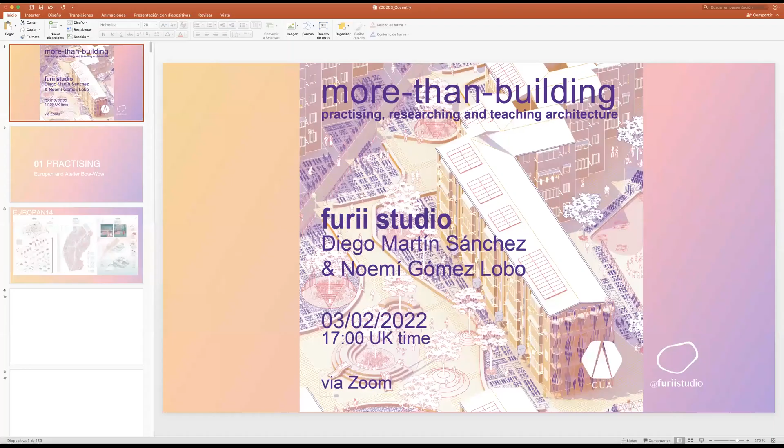Yeah, I think we can start. Let's start sharing the presentation and talking with drawings. Okay. Can you see our screen? Yes, we can. Okay, perfect.

The title of the lecture is More Than Building, and our intention is to show our personal approach to architecture, and how this belongs to a bigger context. In school, most of you are very much focused on building, but through our years in school and after, we diversified our interests and got more interested in other things, and also in the network of practice and of building.

So maybe we can start with the structure of the lecture. We will begin by showing some designs of ours in competitions and art biennials, then briefly touch on our research interests, and finally some examples of our classes at university. Then you will see how everything is related.

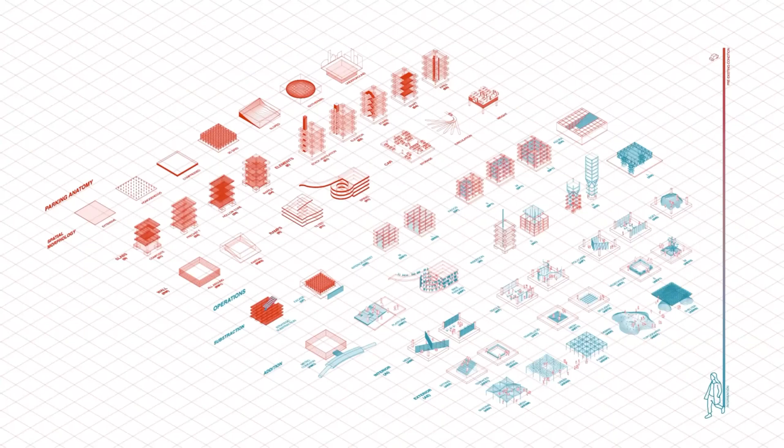This was the premise, and part of the project was to go through this research of really dissecting the typology. This is a very special competition that has been going on for 30 years, in which you can really apply research into the final project, and it's also an open-ended competition.

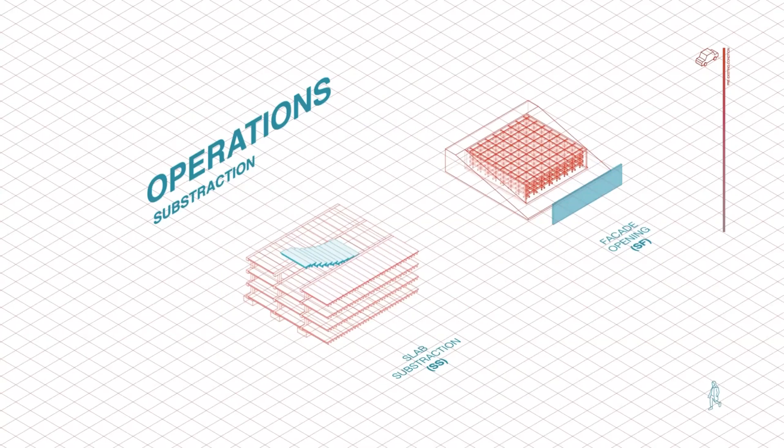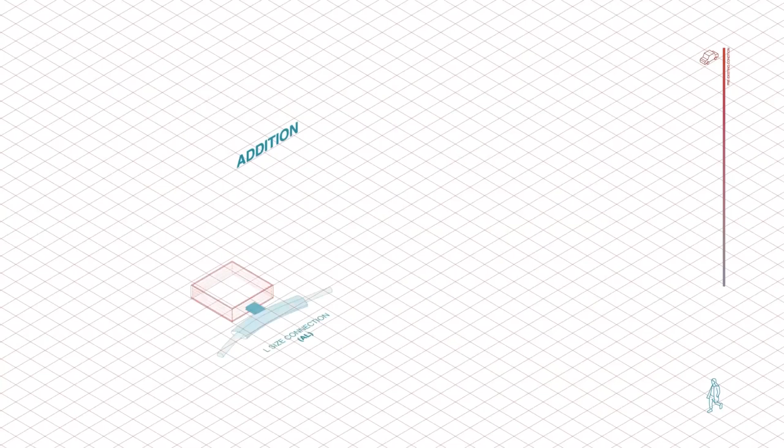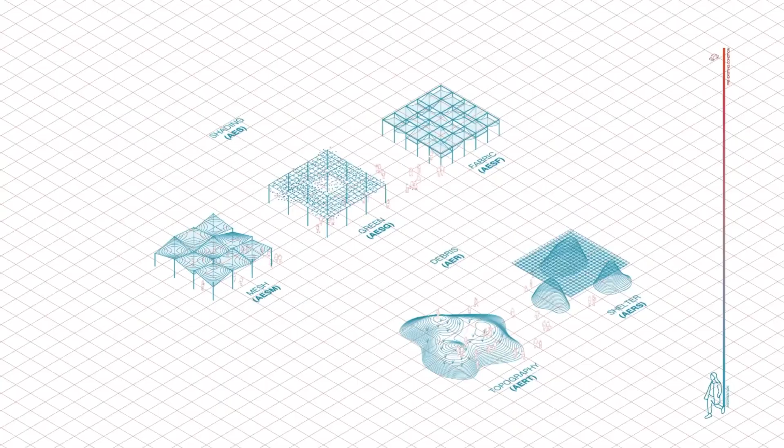In this case, we examined the parking's anatomy and proposed operations of subtraction, since we were operating with the underground. Our aim was to see this as a tool for negotiation, because we knew that even if we won the competition, we would need to discuss with many people how to approach this somehow radical approach to architecture, which involved stripping these parkings.

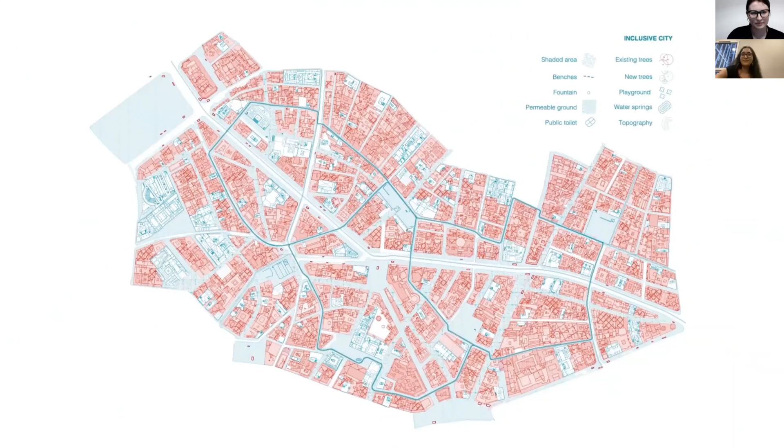All of these are operations of mobility and understanding the inclusive fabric of the city, and how to renaturalize a city center that was much thought for cars or for tourism and not so much for the neighbors or the daily life in Madrid. So how can we reverse this and use these squares as catalyzers of common living?

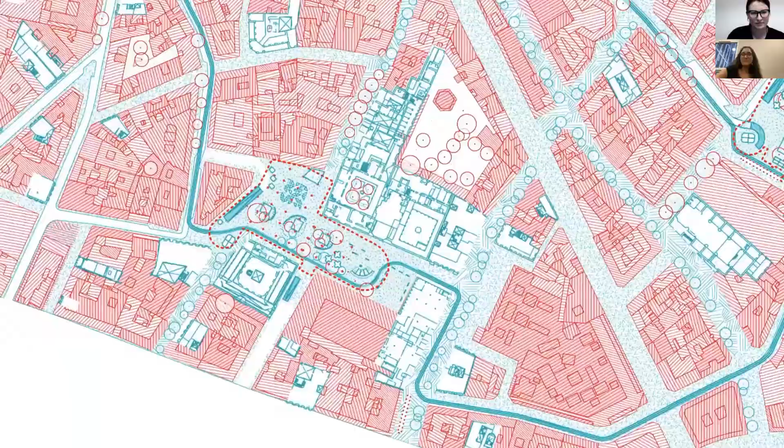Then we went to each of the squares specifically as case studies. We won't get into each of them particularly, but it was important that at this moment Noemí was starting her PhD thesis. We were in Tokyo at this moment, studied in Madrid but were in Tokyo, and somehow we were applying research on gender studies in urbanism into a competition.

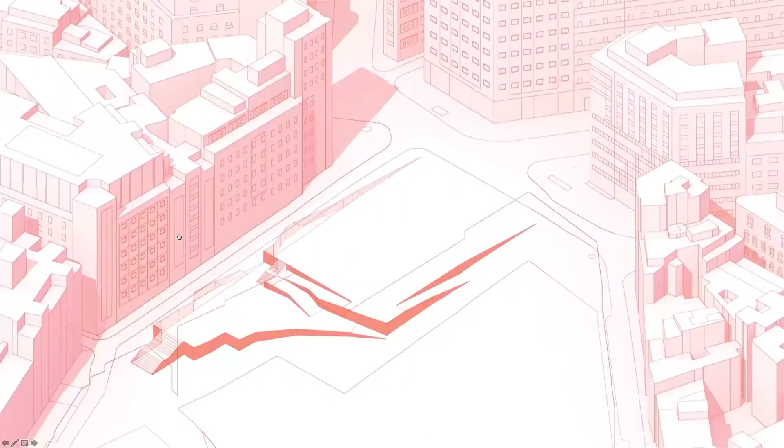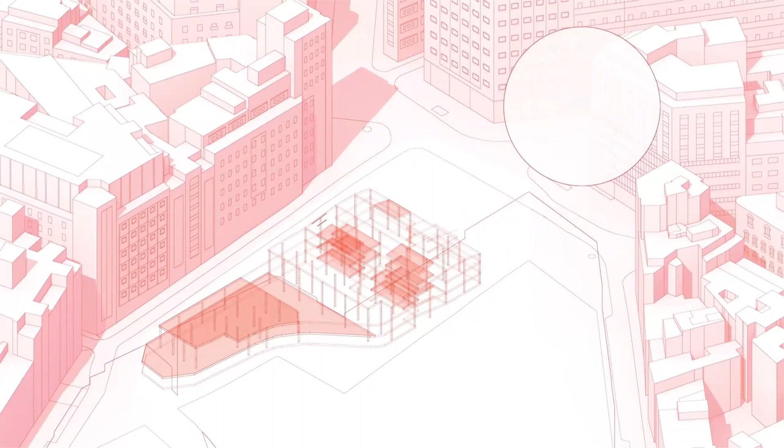Even though the actual project was to create these public infrastructures in the city center, in this kind of parkings that we are going to see. The type of operations that we did: we identified what was underground, and then we started to apply this kind of unbuilding, subtracting facades and concrete walls and concrete slabs, in order to make this car building into a citizen building.

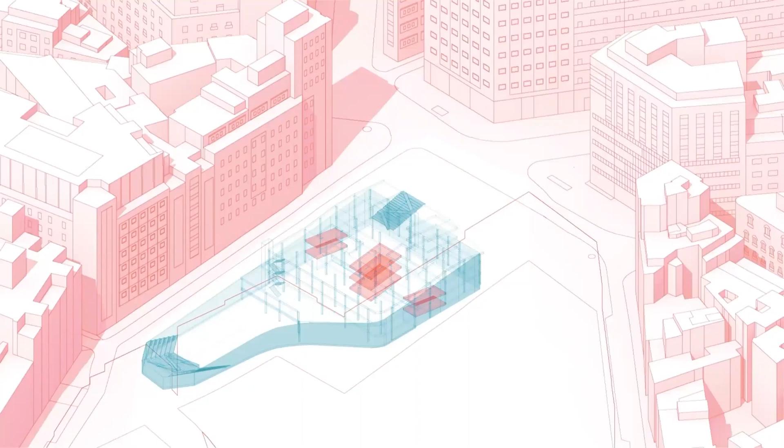But somehow all these scales, from the real detail of how to intervene in these structures, to the urban fabric, to more theoretical ideas of what we were researching at the moment, started to collide, and we started to mix them in this competition.

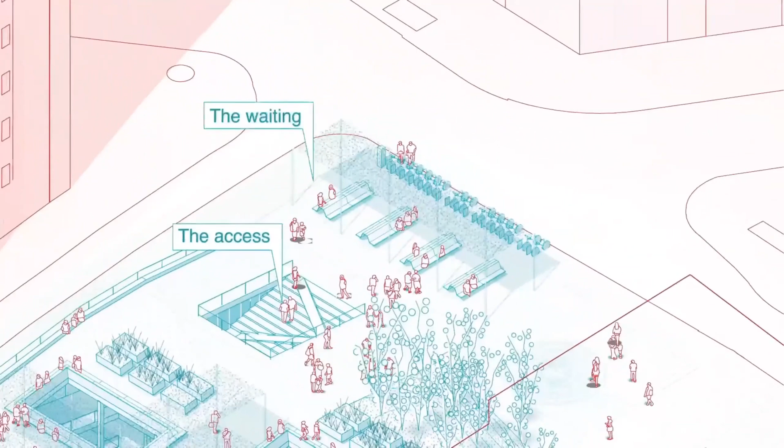Here we were talking about thermodynamics, how this can be sustainable, but we were more interested, apart from energetic or environmental sustainability, in social sustainability as well.

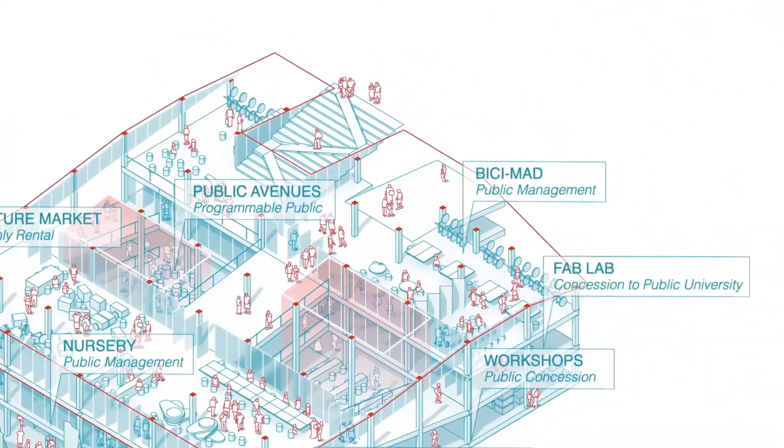Because in these squares, despite being in the city center, they were almost empty during the day, and 50 meters away they were extremely lively public spaces. So we thought about the network of actors that could somehow inhabit a building—which institutional actors, which parts could be rented or could be metabolizing inside this structure—and then there was the next layer of thinking beyond just architecture as we learned in school, but also how this space could be managed.

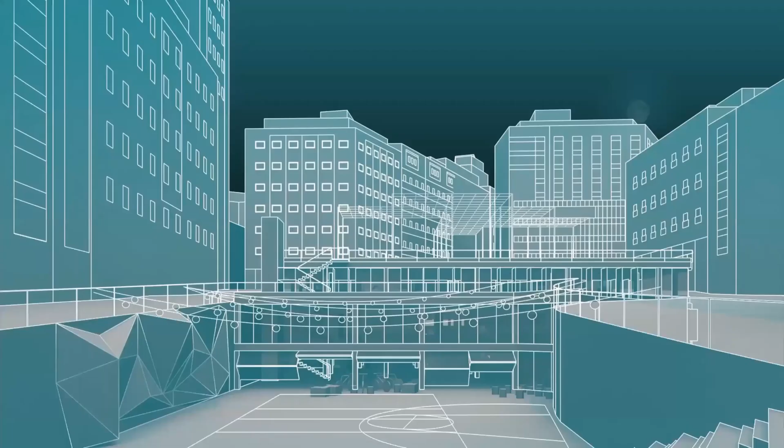As a commons. And of course it's very much inspired by Lacaton and Vassal's way of thinking, of really reusing what is already there.

In this case, we were really understanding the underground parking space as a spatial resource for the city, and by changing the paradigm of mobility and shifting perspective, we could recover or reuse instead of building everything new. There are already many things in the city—we don't have to start from zero, just put another perspective on it and give new light in order to propose new spaces.

This comes back to the idea of open-endedness. It was not a common competition where you just design a library and if you win, it stays like that. We knew that in this competition we would have to engage in a process of negotiation.

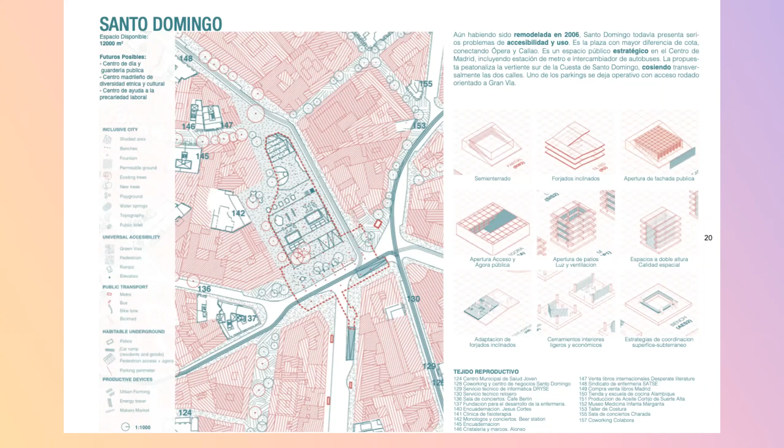So even though the project we just saw was centered on one of the squares more deeply, in the end we ended up discussing with the town hall and the actors involved, and focused on another of the squares, but always keeping the strategies we developed at the beginning.

It's like a very lively space, but also it has been neglected for many years. With all the ghosts and the wanting to speculate and really gentrify this area, we could feel that on purpose this space was not taken care of at all, even though it was actually one of the most lively spaces inside the building itself.

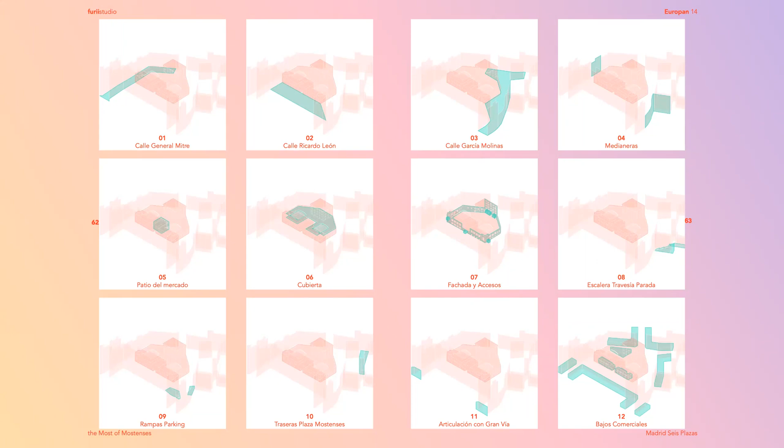So here, for example, you see another analysis, more urban, in relation with the building, of what are the potentialities or the latencies that this urban fabric holds and how we can improve them.

So the next step, as we proposed in the Europan competition, was to really negotiate and discuss and establish a dialogue with the people that actually use this space, the merchants that are working there every day and know very much about this area.

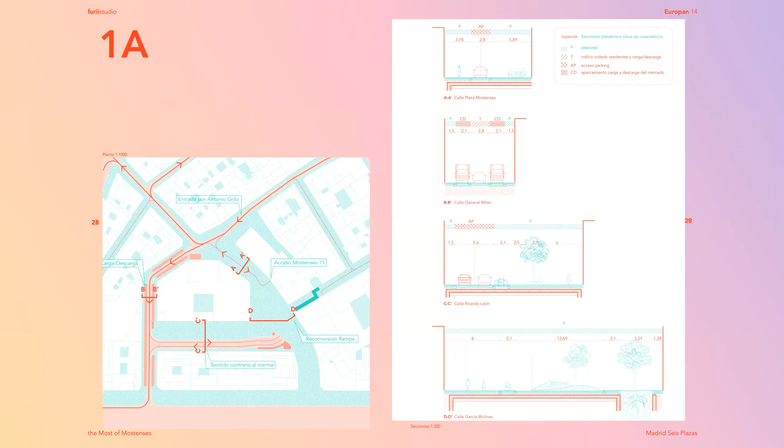And then with them also talking about things that, when you realize, from the competition to the actual implementation, there are all the complexities, like how to discuss logistics. Logistics was very important for this project, because how to load and unload all the food, all the things they need in the market to function, really conditioned what kind of public plaza we could release or afford in this urban setting.

So we proposed many options, also with our expertise, to dialogue together with them and negotiate what was best for the city and for the users.

I think at this point it was very important, this kind of participation of other actors, which was not something that was asked of us or whatever. So we kind of jumped outside of what we were supposed to do, and we also jumped in time.

Because the problem for us is that we wanted also to intervene in the underground parking, which is a public infrastructure, but somehow is rented to a private company that is exploiting the building these days. So we could not access it, we could not change it, but we somehow proposed a plan for the future. We don't know if it will get made, but by attacking this not-so-long future, we all the time go beyond what is supposed to be our task.

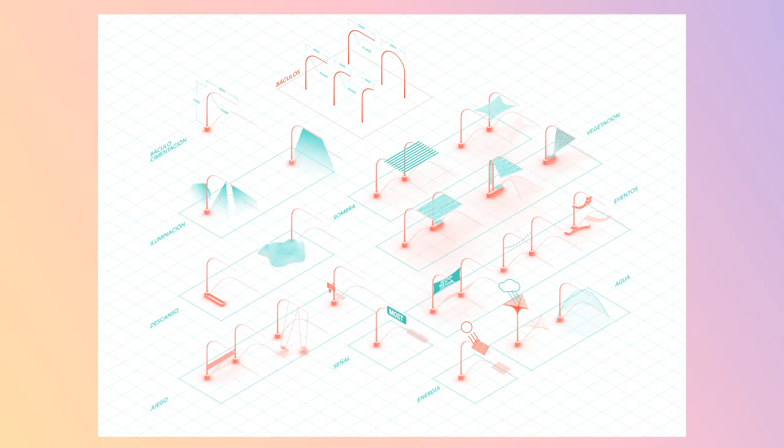In this case, we were trying to reduce traffic lights and somehow recycle all the urban furniture that populates the cities, but that is directed to cars and not to people, and integrate them into our design.

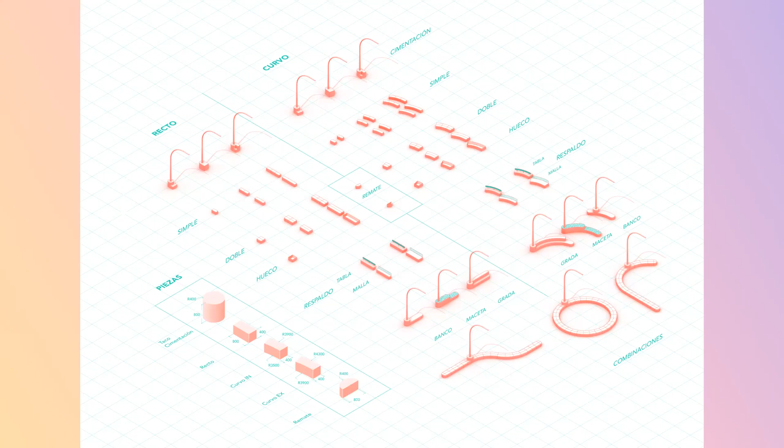But this kind of catalog and open-endedness of things, more than one solution, also helped us to discuss, and not to get rejected or fall too much into 'this is my design and it's supposed to be like this.' Because in the end we are dealing with many actors.

And this drawing was important for us because our project is actually only the public space, let's say street level. But here we started to intervene also in the market itself, in its rooftop as well.

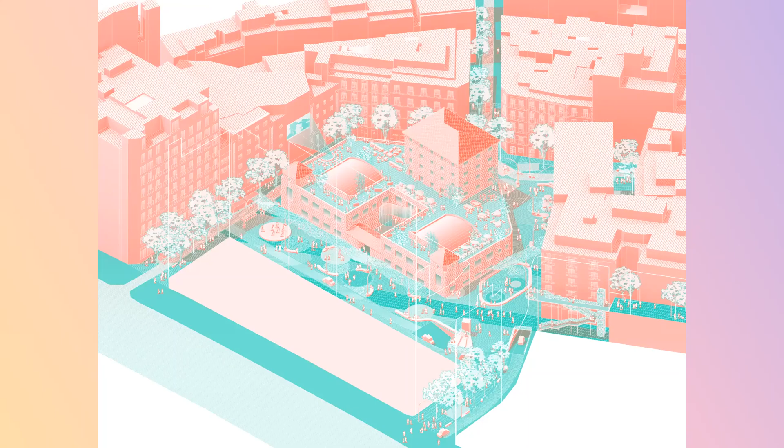We imagined there were some projections towards the neighboring buildings, which are cinemas, and it's like neighbors. We were also occupying some other parts of the street, and by doing this and showing, on the left how we were changing the public space, and on the right how we also imagined the rooftop would be activated, these are other activities, but also the imagination.

Like this stair, for example, that we changed for accessibility reasons. Somehow we created this view from the top of this building, which is public infrastructure but also very much abandoned. And by this, the merchants in the market got very interested and excited, and made it their own. Maybe we can continue.

This is the next edition of the Europan. It happens every two years, and in this case we were applying in another part of Madrid—we always apply in Madrid, in this case it's an obsession. It's a similar process, and in this case we didn't win, we came second, the special mention. But it was the same idea of what we were pursuing at that moment, which was my doctoral thesis about urban forestry, and we were applying and seeing how we could implement these ideas into, in this case, the opposite of the other project.

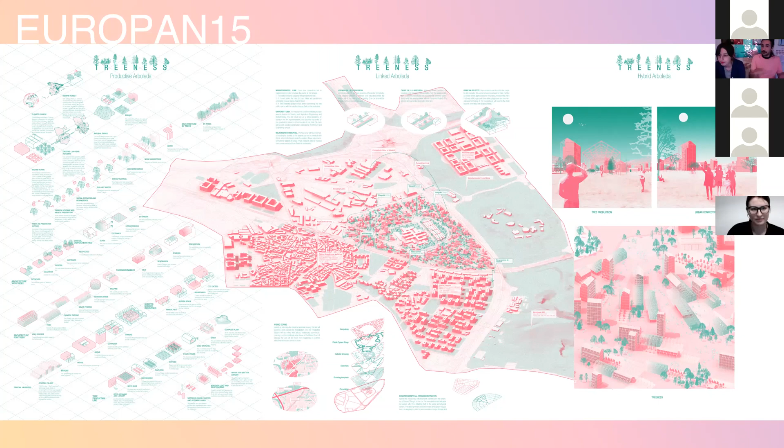Which was like a plot given in the total outskirts of the city, where they built a hospital surrounded by only highways and crazy things. But in this case, we also started to think about how we could think about the production of trees as an industry, investigating the typologies of greenhouses.

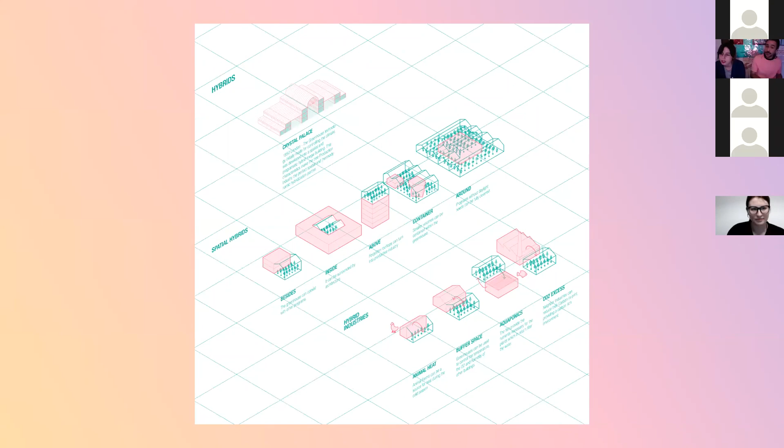These greenhouses have energetic conditions that could be hybridized with other uses, for example housing. Then we started to learn also from the fabric that was around, and in the end, created this kind of hybrid.

In any case, this goes totally against what probably will get built, and what has been built in Spain for 20 years. Now we have many places similar to this one, which is just huge avenues and roundabouts, but nothing. It's urbanized but without people, because of the speculation process that burst around 2010. So somehow it was this level of merging these things. This is the next Europan.

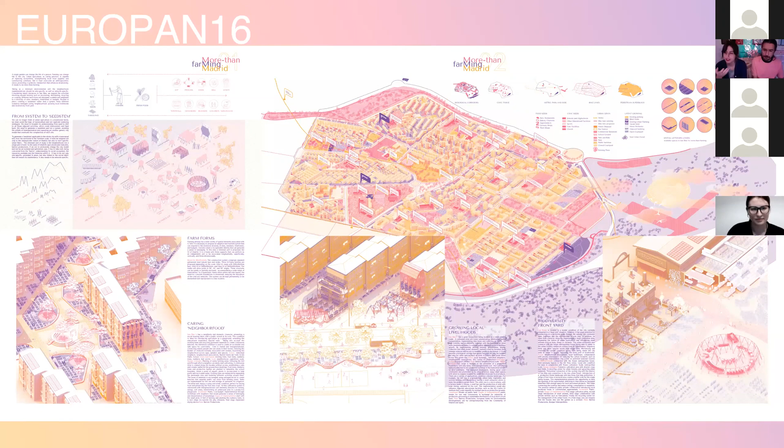You can see a continuation in time, that the topics of recycling, reusing, or understanding with a new vision what is already there, to really enhance certain capacities of the city, is the common thread of all of these projects, and of course also Madrid.

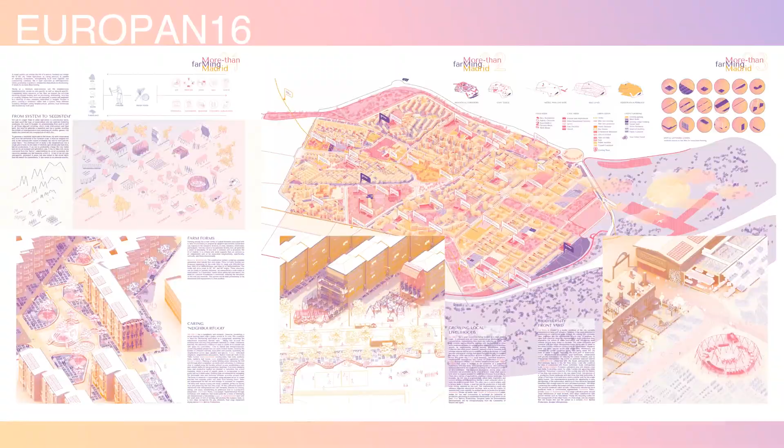In this last Europan competition, again, this competition always raises very interesting questions, and this time it was how to think about urban farming in Madrid, in the city. So first of all, we started thinking about what urban farming means and how it can be more than farming.

With this I mean that, of course, we all know the globalized system that we have, and what kind of environmental problems this can entail, and also how these urban farming practices can arise as alternative practices to really grow local food, and also engage with other agents in the city, not only human but also non-human.

And also to go beyond that of growing itself, to imply more than farming in terms of eating, processing, cooking, and also metabolizing things. So we wanted to expand a little bit the notion of farming, because we thought it has more possibilities for the city, and also for the proposal that we could do.

So in this case, Europan was also proposing some plots. They already have a plan called productive neighborhoods, 'Barrios productores,' identifying some empty plots in the city that are potentially transformable into urban farming plots.

And they were proposing to the competition 5 very different plots, asking us to select one or several and give a solution for urban farming. So in this case, we selected 3 of them that were very close together at the neighborhood scale, because we understood that the environmental unit should be the neighborhood, not a single plot.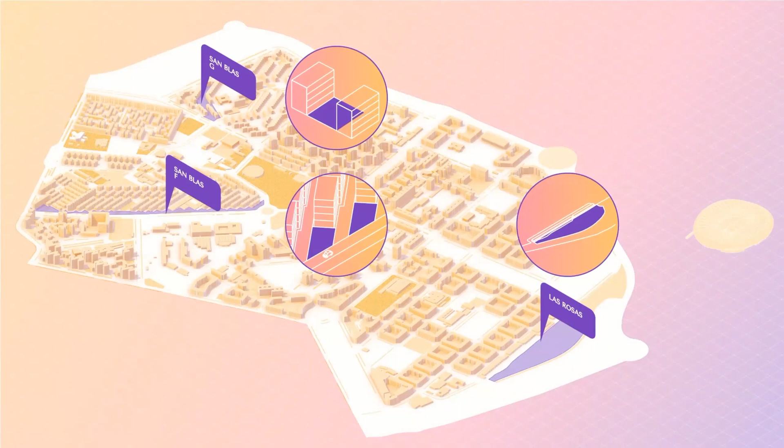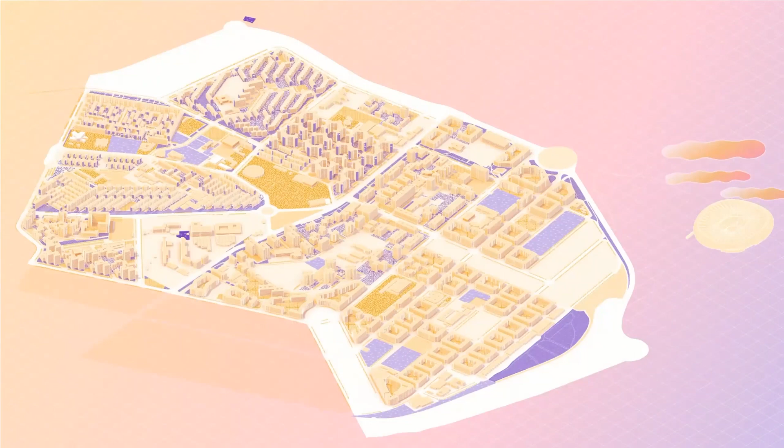So again, very different plots. But again, looking at the neighborhood, we could expand more typologies that could potentially be transformed into more than farming. We were trying to awaken this imagination in the city and really change the paradigm of the typical suburban town that depends on the center for absolutely everything.

So in this next phase of the urban system, we were linking with green areas already and the metropolitan forest, which as you can see is very related to the previous project, also understanding all the fabric related to food and to care, in order to introduce it together with the urban farming system.

I don't know if I'm forgetting something. No, I think you're doing great.

I think what is important here is that they asked us, in reality, about very specific plots, and how to solve things like if the corner got sun, or how we were going to build a greenhouse or something like that.

In the end, we went back and showed this scale, which we thought was important to show that each of these projects belongs to a bigger network of things. If we put the glasses of this urban-more-than-farming approach, then we can see that every bar, every bakery, everything that's already there could belong to this. There's a lot of urban farming that we were not seeing.

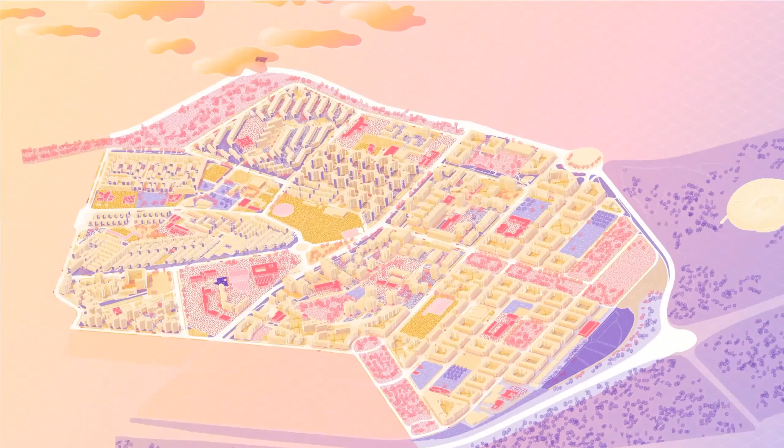We also thought about urban strategies for mobility, for public infrastructures and public spaces, in order to make this also safe, somehow super blocks that will activate this degraded area of the periphery of Madrid.

Following this, similar to what we had seen, we proposed this frame which we call the M of Madrid, one of these strategies in order to occupy the plots that they gave us. It was modular, and we could adapt to many scales: mini, midi, maxi. We made this kind of word play.

For us it was important as an imaginary, to show this imaginary of what we were supposed to do, dealing with this kind of growth in terms of different scales, with fences where things could be separated, places for storing. But then we were expanding, saying we need to think more beyond that.

We need to think of a structure for distributing, a structure for storing, a structure for cooking and celebrating the food, and this very collective meaning of eating that was missing in this area, and also in the concept of urban farming.

Going a little bit beyond what is productive, also thinking what is reproductive, how we can think in cycles more like that, just creating surplus.

These are some of the elements that, as you can see, we thought of, similar to the process in other Europan competitions, also thinking of how to even compost these things, how to deal with the residue of the city.

These are three scenarios of three of the places that they gave us, in which we were slowly doing different operations that went beyond just cultivating areas.

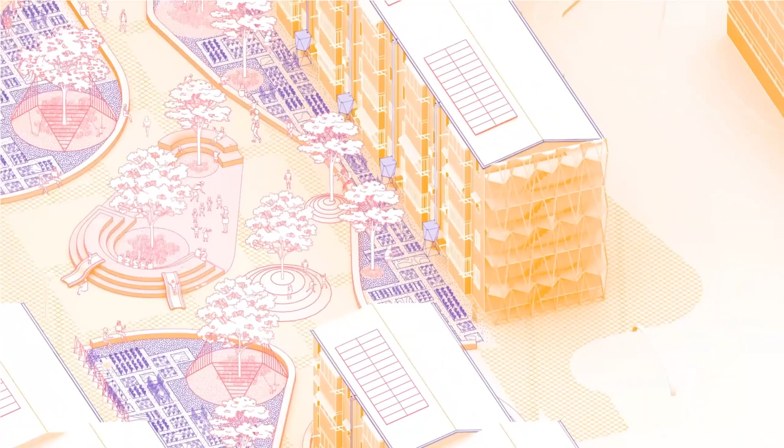We started to think which are the actors that were surrounding. We had, for example, some empty and very well-orientated place with sunlight and wind where we could dry food.

We could create some playgrounds for this space in between buildings, which is free of cars and very much safe, incorporating the elementary school that is next to it.

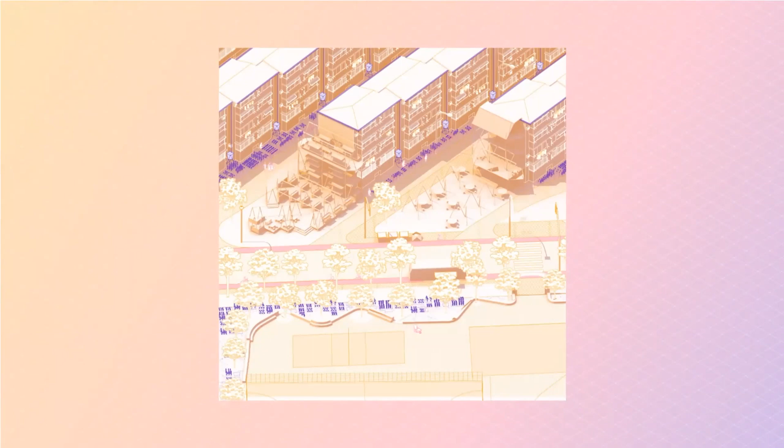Here was the other scenario, next to the street, and in this case we were proposing how to make businesses, taking advantage of this situation of visibility. There could be some greenhouses, some bars, but in any case we were using all these strategies that we showed in the beginning.

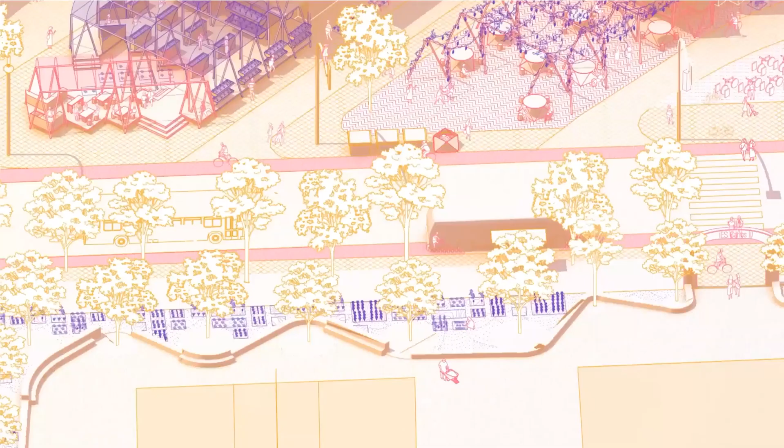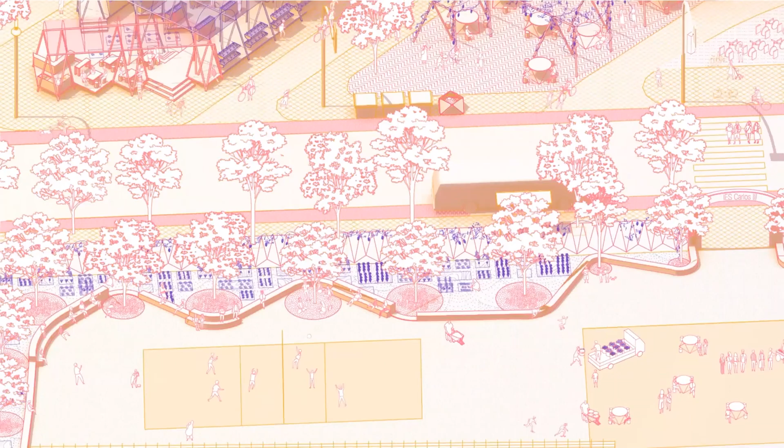When we arrived at these solutions that are completely open-ended, an open discussion we are having these days with the town hall, it made sense. It was not something that just came from above, but something that was slowly cooking until we arrived here.

This is just the last one that we have, which was this open area next to another highway, another kind of residue of the urbanization of the periphery of Madrid.

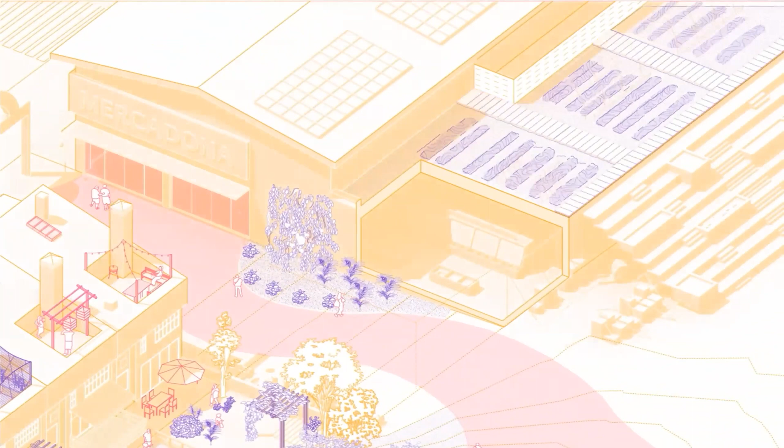We were imagining how the neighbors were starting to also get into this farming, collaborating with the local chain of supermarkets, like Mercadona, which is something very unimaginable, and selling these things inside.

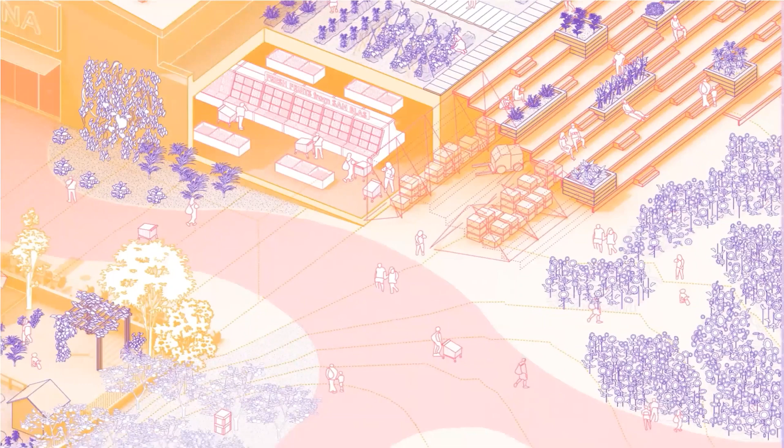We know that maybe these scenarios are not fully possible. This is our ideal future, but somehow we could see that even if we jump one or two steps or elements, we could still make this urban farming or modern farming possible.

Maybe next, very briefly, the next step of our practice, which is of course very related to our research, because we were in Tokyo researching in the laboratory of Yoshiharu Tsukamoto, one of the members of Atelier Bow-Wow, together with Momoyo Kajima. This allows us to practice from the lab in another way, and also as a studio.

So this hybrid format was very useful for us as young architects.

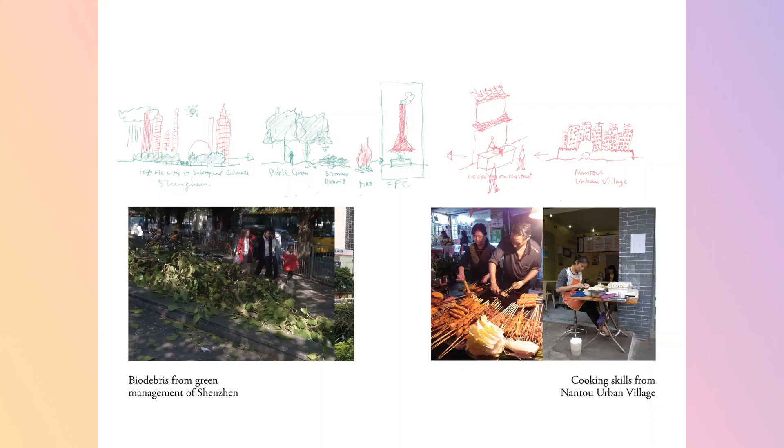One of the first projects we did together with Tsukamoto was this Fire Foodies Club, which relates to the previous project. It combined recycling the biomass, the debris in the city from the maintenance of city trees, together with cooking activities already happening in Shenzhen, China, where the biennial was happening, this was 2017-18. We proposed this pavilion that could catalyze all these activities, the cooking together, reusing this biomass.

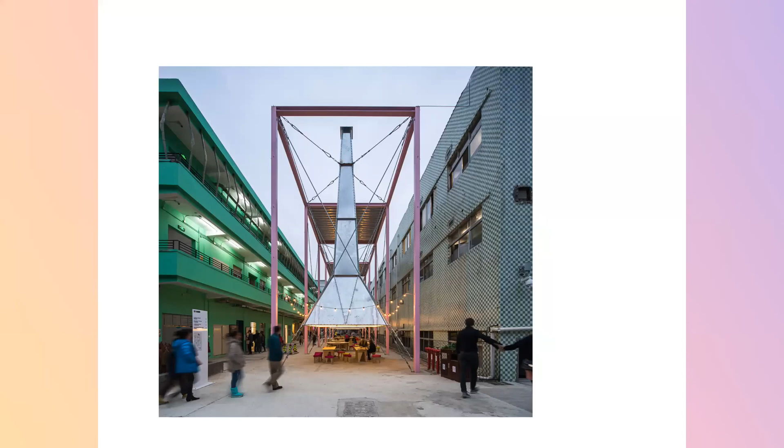But very ironically, just some weeks before the Biennale opened, they announced we were not able to do barbecue. So these big chimneys, the purpose was to do an open fire, an open barbecue, but they said the city was so polluted it could not even burn a single branch of a tree anymore. So this pavilion became like a monument to the contradictions of the city itself, where sometimes you cannot even do a barbecue in public space, but you are surrounded by highways and a very contaminated mobility system.

Fortunately the pavilion was very successful, because as it was a very open structure, it allowed for sheltering unexpected behaviors also. It had water, it had seating, it had shade, and it was a perfect place for performance. All of these activities happened during the days of the biennial, and it is still there.

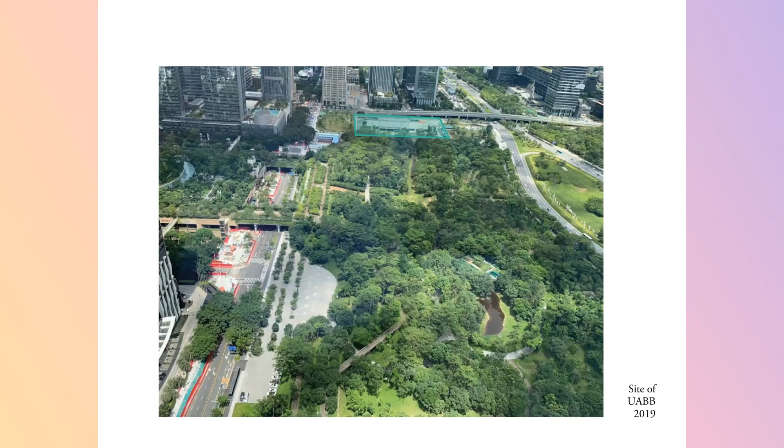The next pavilion is also very related to the previous projects, as you can see. It was 2 years later, but the place had changed. This time it was in the city center, somehow a financial district, in this very beautiful subtropical park which was totally disconnected from the city. The biennial was happening in a train station, but our project was inside this park.

We started to think beyond this, together with the urban forestry, identifying it as an interesting practice happening in the city, going beyond this burning behavior, which somehow stopped us because of the bigger network of global climate change.

Together with the workers, we made this building, which was kind of a diagrammatic building, where all the resources from the forest came and transformed slowly - from the big trees that come with typhoons into logs, into processes of cutting, making timber, making a workshop of furniture with the timber, also chopping and making barbecue again, transforming the waste into compost, and producing small trees again in a sort of greenhouse in this project.

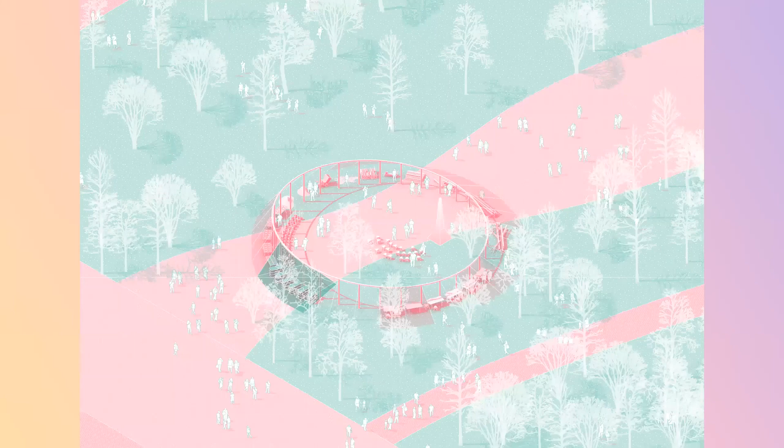But in this case, this project was not built, because it was also the moment when China and Hong Kong were having political issues. So the government canceled half of the interventions that were going to happen in the city.

So it stayed like this. This was somehow together, like Europan here, having two separate pavilions two years apart - we could start to see and learn from one project to the next. In the first one, we really thought we were trying to create this human commons, but we created a linear narrative that, the moment it was cut because of a bigger network, lost its meaning. In this one, we tried to create something more circular, incorporating different resources and processes, and it became stronger, also not just thinking about humans but incorporating the forest as an active agent.

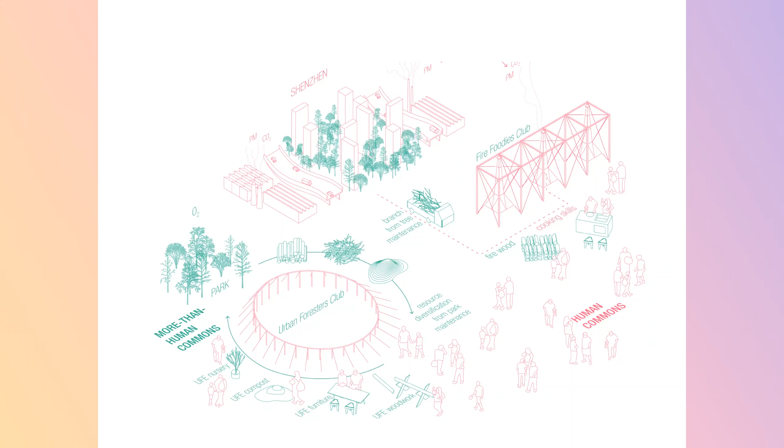This is the final project we did together, this past year. It was reflecting on uselessness and the production of things that come with, in this case, us experimenting with COVID - all these kinds of new plastics that surround us, new kinds of designs appearing, and how these moments of change eventually disappear, and with them a lot of waste, but some things remain. We were interested in rethinking how to eat together in a COVID situation, so we also studied historically how this changed, from eating together around a fire.

I think we will go through research and teaching with some key examples, so you can see the link between what you just saw and what we were researching in our thesis, and how we try to apply what we research academically or theoretically into applied projects. So first, in the section of environment, Diego will explain how it's very obvious with the previous pavilions.

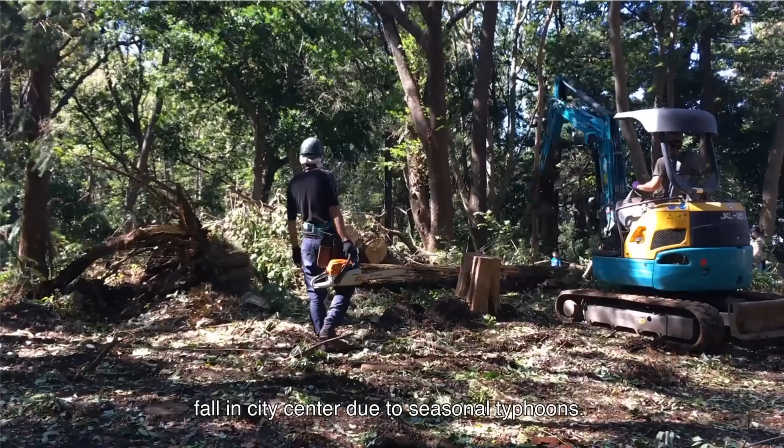This is a situation that happens in Tokyo every year with typhoons, and that was very shocking for us coming from Madrid, where of course we have trees, but this kind of landscape of real forestry, dealing with huge trees falling because of this very strong phenomenon, was very important for us.

We started to dig into these practices happening in this crazy city - when you think of Tokyo, maybe you don't think of this. We got interested in what this practice is, which kind of practices around the world deal with this urban forestry, in the sense of dealing with the resources that come out of it, and also with the actors that can be together with it.

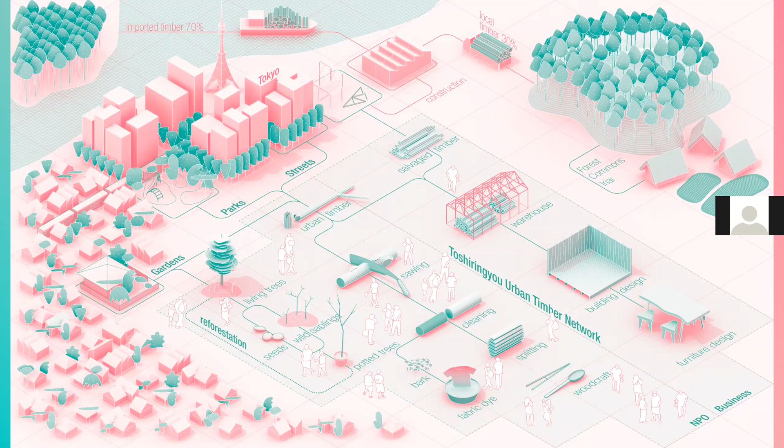For example, here we were mapping and diagramming a network of an architect who is also an urban forester in Tokyo, who every time a tree falls gathers a community and makes a workshop, and everybody takes care of that tree and turns it into furniture and so on. It somehow has a business side, but also an NPO side, which was very interesting for us.

Also thinking about how in the urban environment, in the built environment, we have made these empty spaces for trees and for the forest in the city, and somehow they're only accessible by workers - we are in a very passive manner. But by researching Tokyo's parks, doing a lot of field work, we could start to see some repeated elements that allow for interaction between humans, non-humans, and resources.

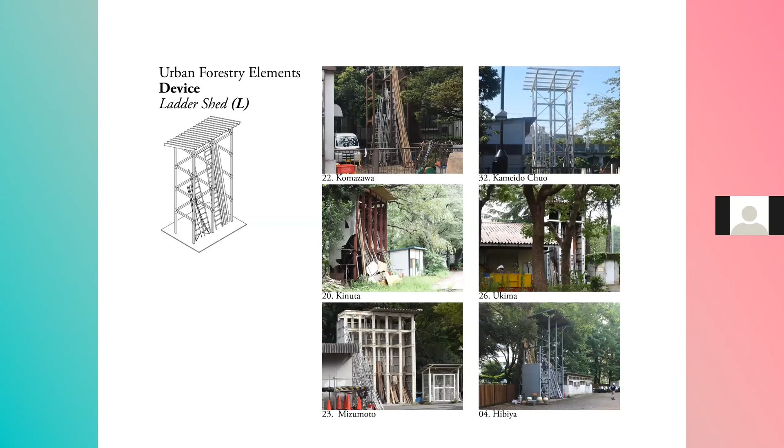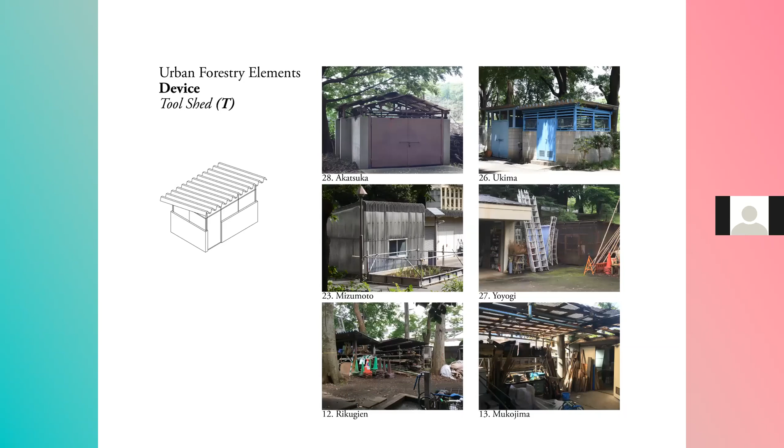Here you will see similar things to what we've seen before, focusing on elements, and how these elements together with the landscape and the network make these kinds of assemblages that can go beyond the human commons and also the environment.

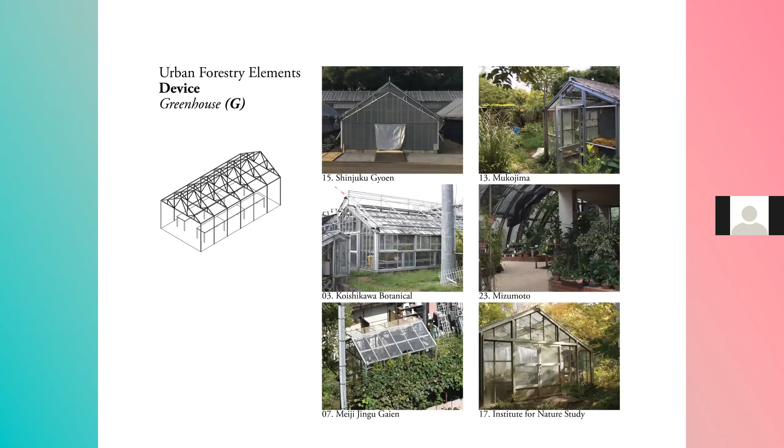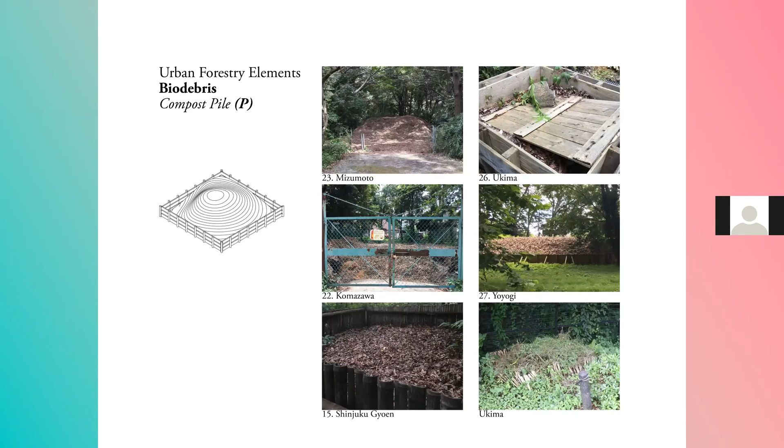Here are some devices, this kind of crazy mountains of logs that were happening in the middle of the parks in Tokyo. This is maintenance, not productive forestry in the sense of conventional industry - it's a care practice.

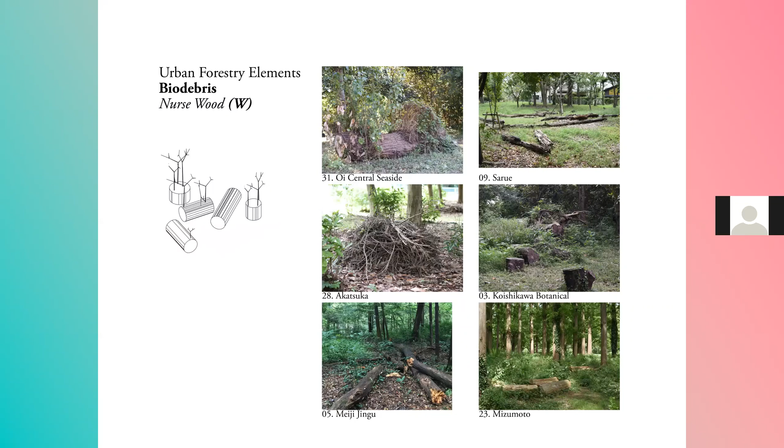Some of these areas, for example, had logs left there in order to actively enhance the life of certain insects or certain mushrooms. There were these practices happening unnoticed, or these tree nurseries that people were tending, around this kind of production of city trees inside these parks.

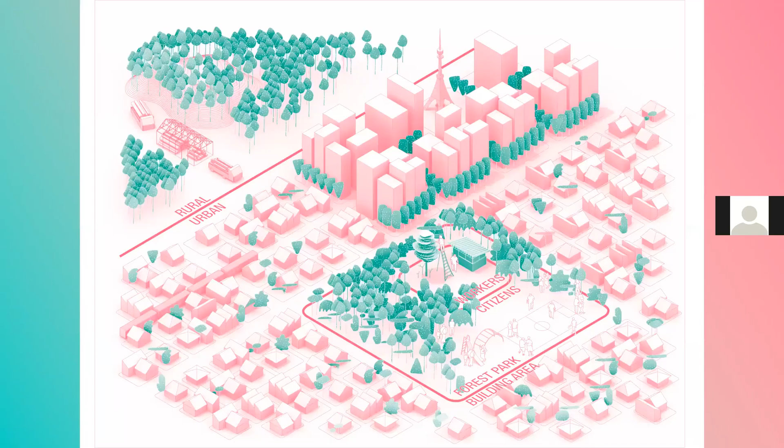And some places remain only without human access, only for birds and for insects and for non-humans. In this case, we did this very detailed research of the Tokyo Metropolitan Parks, and we were trying to incorporate all these ideas into the city.

And like the ones that Diego just saw, you can see how the Europan competitions are really applying what we were seeing in Tokyo in the Madrid context.

So the first part of the thesis, I was researching the Japanese house, identifying three gender-charged spaces with these gender construct implications: the kitchen as a place of woman's work, the master bedroom as the marital space of the couple, and the study room, which had a very powerful meaning as the man's quarters.

So my question is how the contemporary Japanese house, especially works by contemporary architects, challenge these assumptions and preconceptions, especially in the 50s and the post-war period when, with the high economic growth, these kinds of images were created through women's magazines.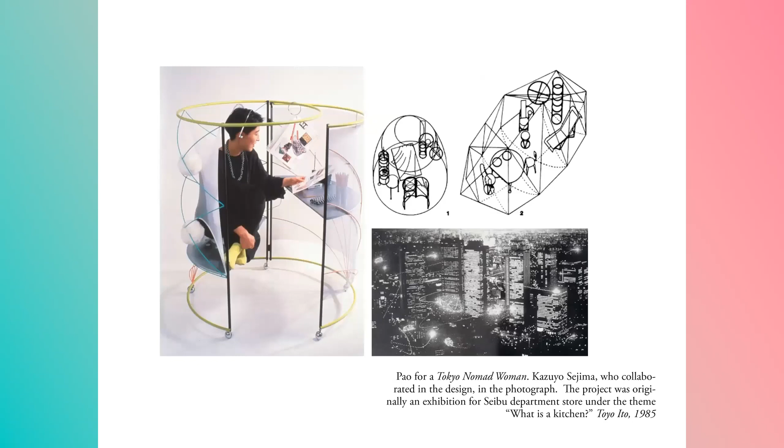Here the dining kitchen, for example, something super common today and nothing rare, was an innovation at that moment. Miho Hamaguchi was one of the pioneers and one of the first female architects in Japan to vindicate this. But we can trace the genealogy until Kazuyo Sejima.

You can see in the project she did for Toyo Ito, a Tokyo nomad woman, this kind of dissolution of the house itself. It's interesting that this project was originally an exhibition for the Seibu department store, and the question of the theme was actually: what is a kitchen? And this is the result.

So by going beyond and challenging this notion, they were performing very different types of houses. This exhibition, curated by Tsukamoto Sensei, Professor Tsukamoto, was a huge inspiration for the research. And there was a great book where many Japanese houses are organized in genealogies.

But for me it was very interesting, this gender perspective on the Japanese house, and to understand what were the strategies for challenging this domesticity. How these houses start to behave and celebrate cooking, to recognize labor inside the house, to open up the knowledge for all residents - going beyond the stereotype of the minimal white nice house in Japan, and seeing how space is really performing.

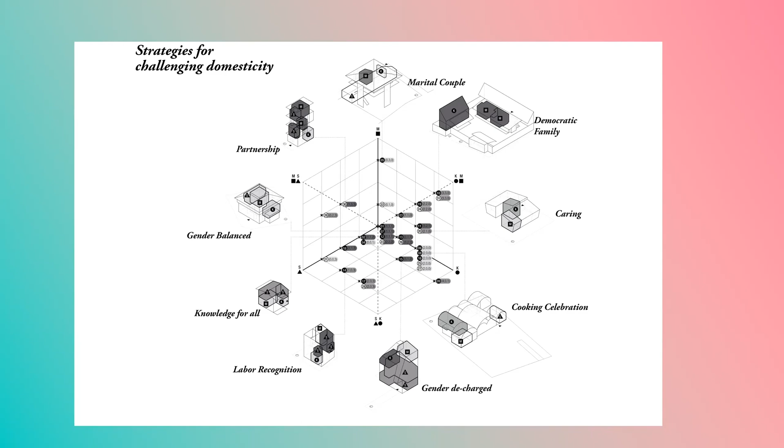Here, last month we were researching more specifically the change of the kitchen, the Daidokoro. Here you can see the Sky House, and also here Azuma and Tower House, and here Toyo Ito. I could talk one hour about each of these houses, but I think I have to go - if you have any question, you can ask later.

The other very important part of the research was to understand this behavior also not only in the houses, but in the urban fabric. For this, I selected a very special neighborhood called Jiyugaoka, that many of you, if you've been in Tokyo or live there, may know - it's very well known for many shops. It's a very nice neighborhood, and I was very interested in it because I could see a kind of public space that I couldn't see in other parts of Tokyo, and I was wondering what happened if I apply the gender perspective to this place.

So starting by digging into the historical context of Jiyugaoka, it was a suburban area in Tokyo in the post-war period, and we can see these images of domestic life versus the salaryman or salary workers in the train, and the gender division is very clear in these post-war years.

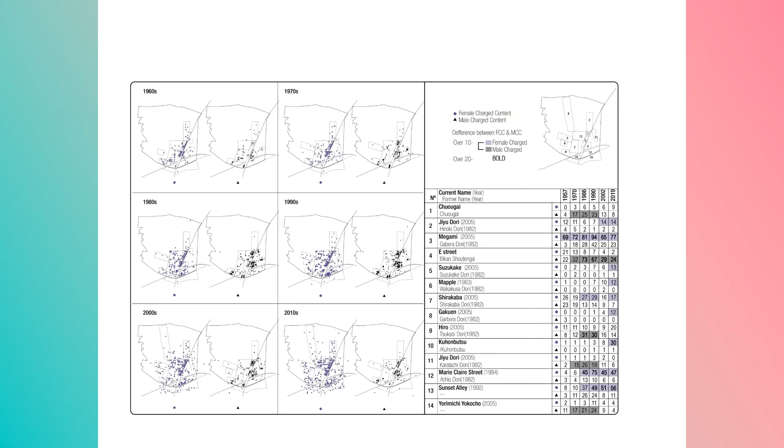So we went through all the contents of Jiyugaoka in terms of shops, and how this was changed and gender-charged as very male-oriented or very female-oriented businesses. We started to study historically the changes of the city and how Jiyugaoka was performing in terms of gender.

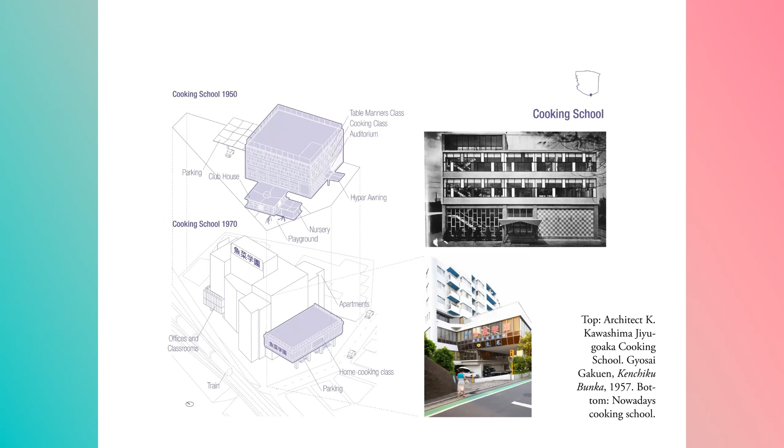Here you have some examples of very interesting typologies that only happened there. Like the cooking school that started as a cooking school for housewives in the 50s and is still there today, and the building, of course, metabolized. Or this building that was like a boutique store for idols that used to go there, and you could see your favorite idol selling customized clothes—like Seiko, a very famous idol singer of the 80s in Japan.

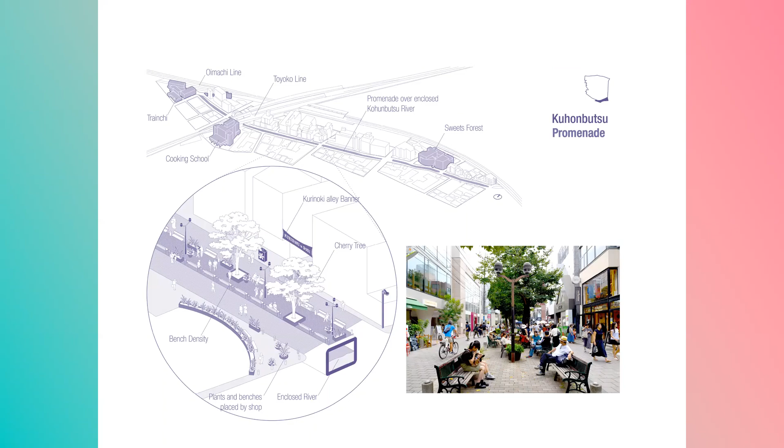Lastly, the Kuhonbutsu Street is a very rare public space that also happened only in this place in Jiyugaoka, with a lot of benches—if someone has visited Tokyo, they know it's very rare to find a bench. So this complex phenomenon of genderification resulted in a very accessible, inclusive public space, which maybe we can discuss later.

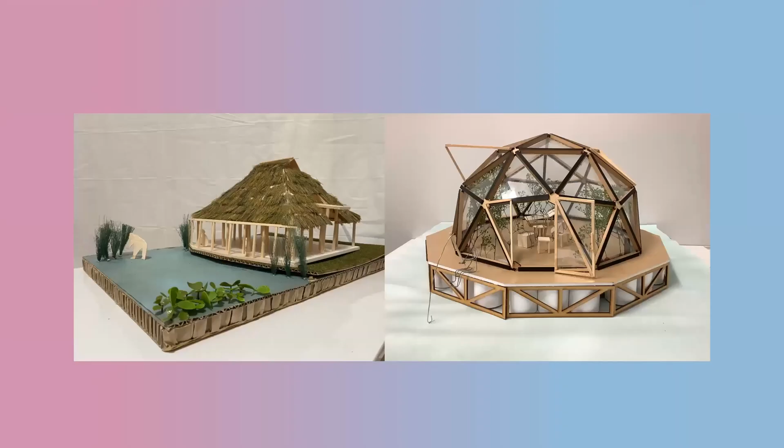Just briefly, to give two examples of how to apply this into our teaching practice, since we don't have much time: in this case, we also teach, and we try, for example, in this workshop about urban forestry in the city of Nagoya, to expand what we do—throughout what we research, but also learn a lot from the process.

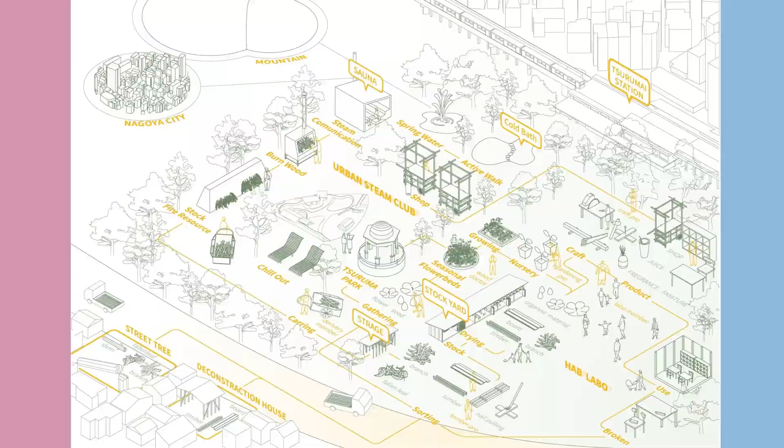Opening our practice to other members and other actors somehow also reflects on us, and we learn from it. This is another one—Noemí led this studio. It's very related to the research on urban space that I just explained about Jiyugaoka.

How the city many times performs in this binary way, where there are very clear productive centers and residential areas—that's where the productive fabric happens and creates these binaries in the city. We were also identifying one more binary created by the COVID-19 pandemic: the difference between essential and non-essential work.

So this surplus work—we were also, again in the studio, researching all of these typologies that had to be physical work, and what are the spaces that actually embed the ecology of things in these spaces.

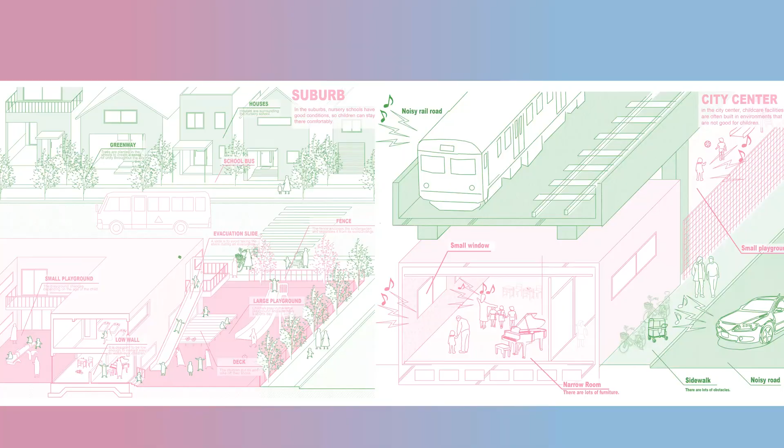For example, the very clear example of elderly care, or also the care of children in the city—usually, if it is in the city center of Tokyo, it happens under the railway, in contrast with the suburbs, which have greater outside areas. Also the change of home skills and homemaking through history, and also bars, like izakaya.

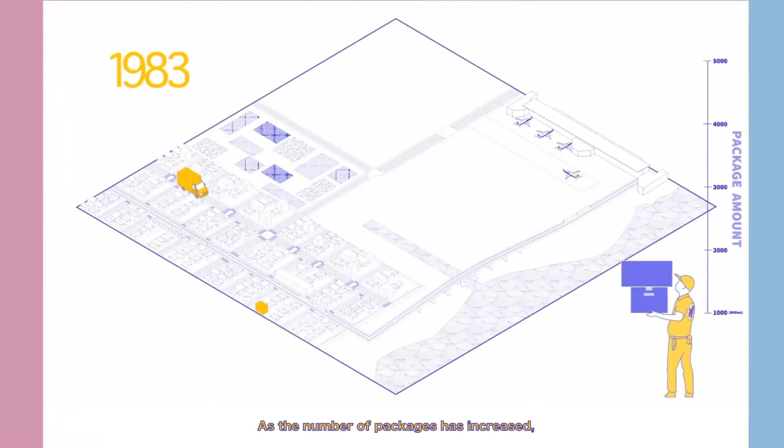And then, how to explain—we propose a new logistics system, and then how to apply all of this into a project. This video you are seeing is by the students. In this video, they somehow go from research to application to give a new vision for the city—in this case, how to challenge the logistics system in the city.

To really propose an intertwining to facilitate how to provide the luggage and package system in an easier manner by hybridizing with the train system—so how to care about this suburban fabric in a more local and more accessible way.

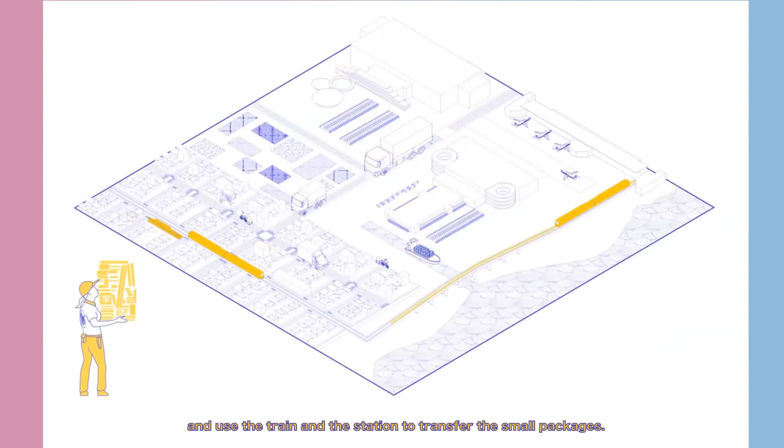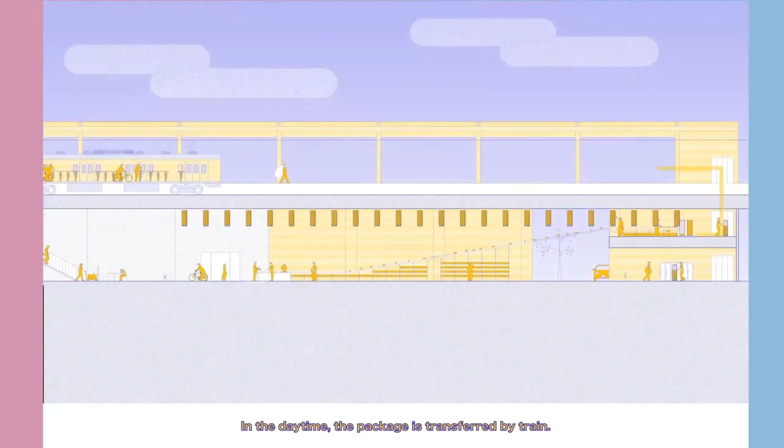Now, just to reflect on this - it's somehow made by someone else than us, but through this discussion, this research, this teaching, it's how when we learn and go beyond architecture or what we were taught, when we expand our network and really feedback, this is kind of the purpose of what we do.

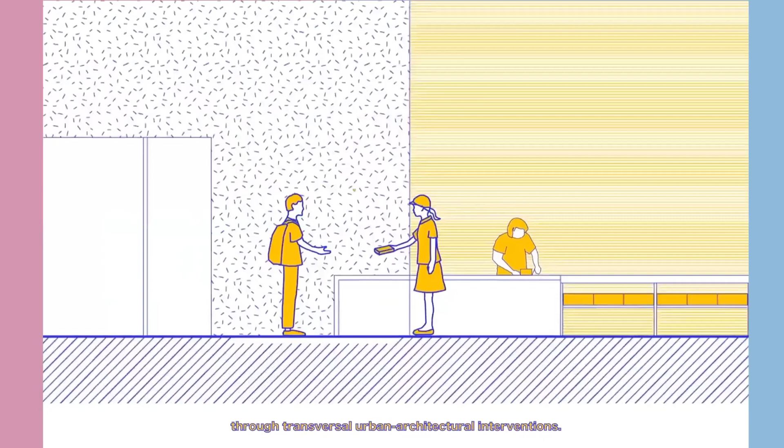And for us, somehow this practicing, researching, and teaching is really like a unit and very much intertwined. I think that is maybe a thing of young architects - out of necessity and out of care, we are practicing in this way.

So I hope that it helped you to get inspired or to have many questions, or maybe it was a lot of information with a strong Spanish accent and very fast, and many images, but I hope that you can engage in conversation and ask us whatever you want.